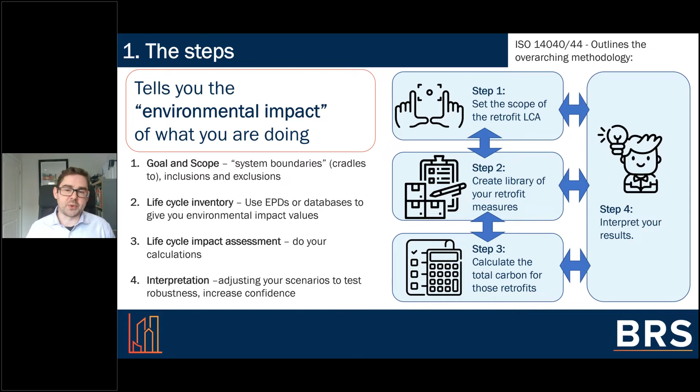So when it comes to scope setting for a retrofit project, you really want to set it so that you get the best perspective on the global environmental impacts of your retrofit measures.

So in terms of perspective, we in the construction industry are very, very good at estimating and calculating the operational energy demand and associated carbon emissions. But operational energy demand is only one part of one stage of a 5-stage process for calculating a building's whole life embodied carbon and environmental impact.

So an LCA provides you with the ability to get the right perspective on how sustainable your retrofit project actually will be. And I guess another thing worth taking away from my talk here this morning is that a truly sustainable retrofit project goes beyond low U values and high COPs for heat pumps.

Setting the scope means how much of the retrofit materials or measures' life do you want to calculate before the retrofit project is handed over to the client, and how much of the retrofit measure do you want to track during the life of the building. That includes repair and maintenance of that material or technology, and how much of the retrofit measure's journey to its end of life do you also want to track.

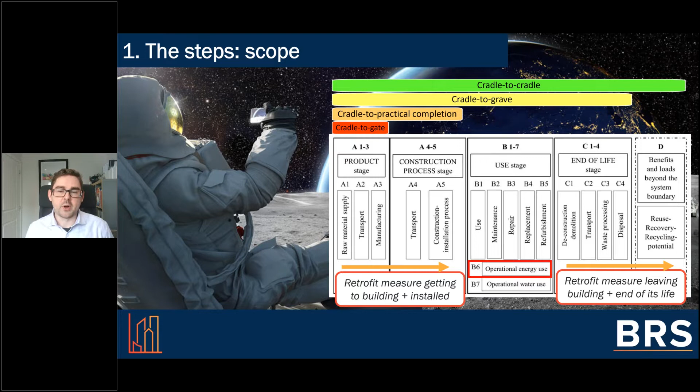So as construction professionals, we can do more to reduce global temperatures by critically evaluating the whole life cycle environmental impact of the materials and technologies that we specify, and changing our supply chain. We can do more to achieve a sustainable future for Scotland by doing that, more so than if everyone in the audience here today left your office, went out and bought an EV this afternoon. And that's what we are calling short-term gains for long-term wins.

Now, I want to talk about the role of the operational energy within the LCA and how that can be used to effectively support your retrofit projects. So I've got two slides here, one for retrofit evaluation and the other for retrofit assessment, which are very, very important steps in your LCA.

Both of these I've covered in a lot more detail in that other BEST knowledge exchange video I mentioned earlier. Now, I have both slides added to this talk here today because I want to continue to dispel the notion that retrofit evaluation only happens at the end of the retrofit when it's complete. Having that approach is very wrong and potentially hazardous, especially for our traditional building archetypes.

So you use your retrofit evaluation toolbox to establish the baseline energy performance of the building before you even start considering what retrofit measures you should be applying to the pre-1919 traditional Scottish archetypes. Because this archetype, more so than almost any other one, will be a lot more sensitive to how your retrofit measures affect the building's ventilation strategy, the thermal comfort, and also moisture dispersion.

So for operational energy calculations, at the very least, you really want to get insightful energy consumption values that you can get from loggers or more detailed fuel bills. And if you can't or don't want to wait a full year to measure the building's energy demand before retrofit, then you're going to need to use other tools like U-value measurement, thermal bridging, thermograms, air permeability, etc., to give you the actual values for use in the next step.

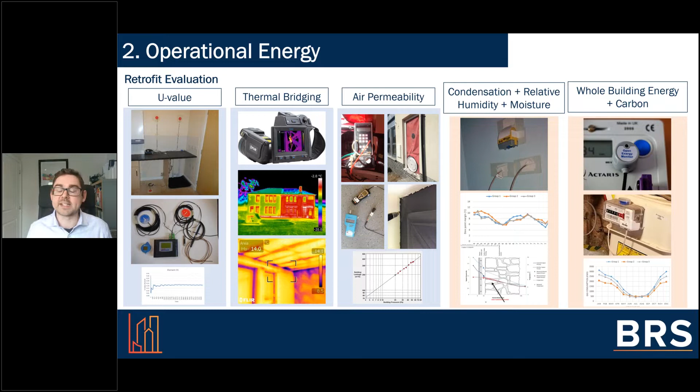And the next step then is retrofit assessment, which does happen only after you get those baseline pre-retrofit values from your retrofit evaluation step. Then, with much greater confidence, you can build your digital model of your building, digital twin if you like, and run your range of retrofit measures through your model to generate a set of retrofit scenarios.

And of course, you'll be looking at other effects of the retrofit measures like fire spread, acoustic enhancement, U-value, psi value, temperature factor, moisture dispersion, etc. And yeah, they all do play a very vital role in the decision making for material specifications, but it is the modeled energy demand reduction from the various retrofit scenarios that you'll be using in your LCA.

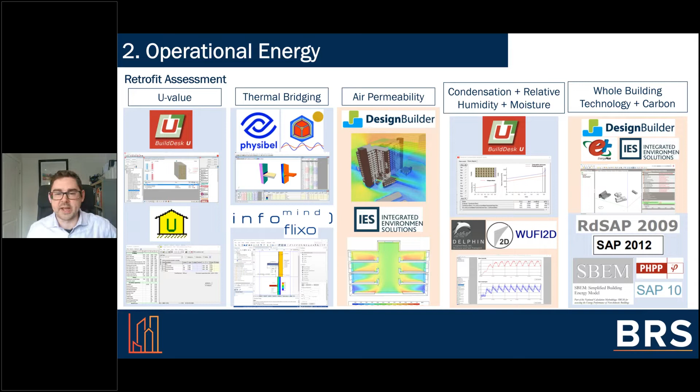And it's really, really vital to get those actual in situ measured performance values from your actual building, as opposed to assuming values from RDSAP or SBEM and other lookup tables.

Right, this is my last section. I'm going to bring this all together and demonstrate how the LCA output is a decision support tool to inform a more sustainable retrofit project.

In the first relationship, for a structural material like steel, say you're extending that 1750s Midlothian cottage with a steel beam system, a Mies van der Rohe kind of extension. Scenario A would be a steel beam that's over-engineered, larger than it needs to be. Scenario B is a steel beam sized exactly for the intended purpose.

Scenario A, the unnecessarily larger beam, will have a larger embodied energy value because more steel was manufactured, more was transported to do the same job, and there's more steel to get rid of at end of life. For both scenarios, if detailed and insulated correctly, the size of the steel member will have little to no bearing on the building's operational energy, but it will have higher embodied energy. So there's a clear winner: you go for the beam that's appropriately sized.

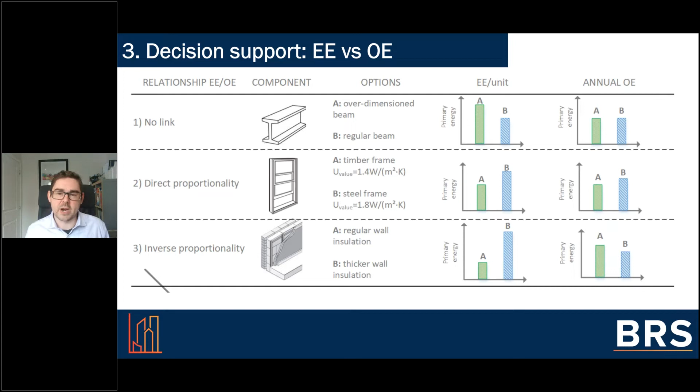This is what we call inverse proportionality, which is really the most common type of relationship you see in retrofit projects. This is what makes LCA the most valuable tool, because in this instance there's no clear winner between thicker and thinner insulation - one's better for the building today, but one's better for the environment longer term. Your LCA will tell you if the operational energy savings will ultimately justify the larger environmental impacts seen in embodied energy.

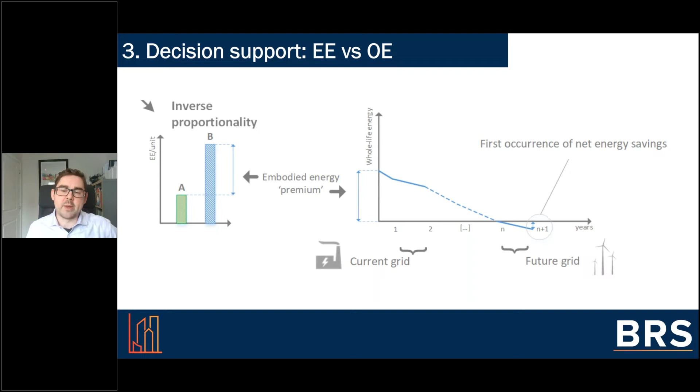So the LCA is here not just to tell you the environmental and sustainability impacts of your retrofit measure today, but it'll also tell you how that retrofit measure will impact the environment in the longer term.

This is my second last slide, and the last two are very quick, so I'm going to wrap up. Coming back to our original question at the start: how can an LCA be used effectively in a retrofit project? The thing to be aware of is retrofit is almost always better than knocking the building down and starting again. There's something called plot renewal, which I haven't talked about today, but that's definitely worth considering for non-traditional archetypes in Scotland.

LCA allows you to make more informed decisions because it is by design a decision support tool, and it's also there to allow you to do carbon hotspotting, which enables material optimization to challenge your supply chain. Retrofitting energy efficiency measures is all about balance, and an LCA allows you to strike that balance between measures and materials that save operational energy and those that help you save embodied energy.

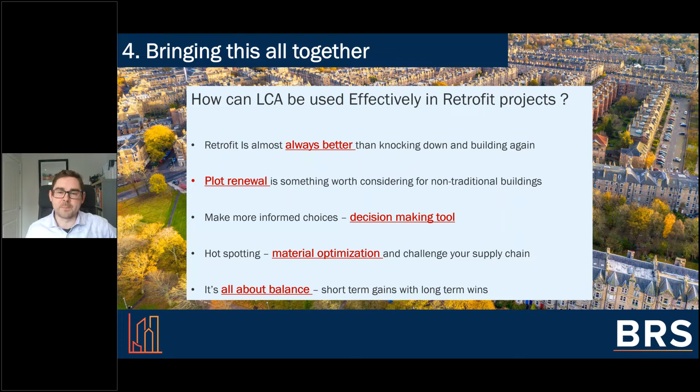Thanks for that, John. Thanks for that excellent presentation. Very informative, and I'm sure everybody agrees that it was really quite insightful in what we need to do for life cycle assessment.

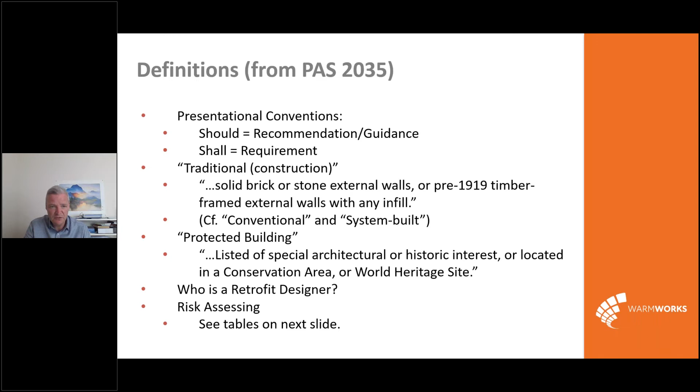Now, risk assessing - I mentioned this is worth clarifying when we move into the world of traditional buildings. PAS 2035 provides retrofit coordinators with a handy ready reckoner they can use when beginning to look at a programme of works, in terms of categorising the risk associated with installing energy efficiency measures. The individual measures themselves will each carry what's known as an inherent technical risk, which can influence the particular path followed. As you move up the risk rating scale from A to C, that tends to place greater focus on the compliance standard being followed through that project.

But traditional buildings are always a minimum of risk grade B, and protected buildings always a grade C, if not higher. A traditional building may be classed as category C depending on, for example, the number of measures being fitted. One thing I would always emphasise is the dynamic nature of a risk assessment.

Any student of retrofit will be familiar with expressions to do with corners, junctions, edges and interfaces, for example, which naturally leads to considering where the wall meets the roof, where the wall meets the ground, etc, and how the external wall insulation will interact with the loft insulation being installed. We consider that around considerations of thermal bridging, for example. But there are a couple of other interfaces which have to be appreciated as part of the process.

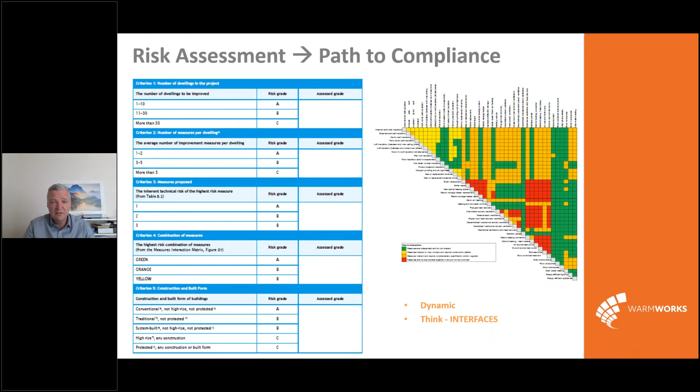Another interface which has to always be front and centre, I would suggest, is to do with the occupant - how the person living within the house uses energy at the moment, any changes likely to happen in the years ahead, how familiar they are, how complex the systems we're looking to install may be, and how they'll be able to operate and live a nice, comfortable life within the property. And that all feeds in from what's gathered during the retrofit assessment. So these are the half dozen or so critical component parts of that.

An energy assessment is conducted by the retrofit assessor, who is a domestic energy assessor upskilled to be qualified and accredited as a retrofit assessor. They'll conduct that RDSAP assessment looking at the asset itself, the heating and hot water system, and the lighting. We instruct all assessors to export that detail into full SAP so the retrofit coordinator can conduct various calculations as part of evaluating the various options.

For any certified passive house designers among you, PHPP is acceptable within the PAS. I mentioned the occupancy assessment, especially if it's a vulnerable person, but it will also introduce heating pattern detail and how the person within the house uses appliances, how much they spend on fuel. The overall purpose is to meet the intended outcomes set at the start of the programme - whether that's a reduction in energy demand, a decarbonisation programme, or improving a SAP score. There's always going to be various drivers or combinations of drivers involved in a programme.

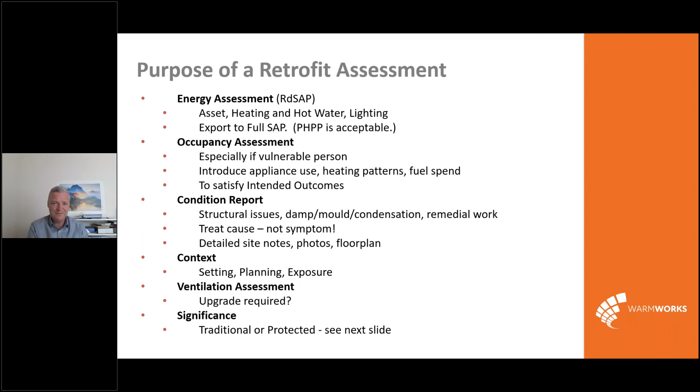And then lastly, significance survey. I'll give you a bit more information on that. I'm not going to go through this line by line, but this becomes more and more relevant when we move into the world of traditional buildings.

So, protected - back to what I mentioned earlier about listed, conservation area, World Heritage Site. If it's a protected building, the retrofit assessor attending site must hold the Level 3 energy efficiency measures for older and traditional buildings qualification, and a full assessment shall be carried out in accordance with BS 7913.

But for traditional buildings more broadly, as defined by the PAS, an assessment of significance shall still be carried out. However, the BSI have produced a simplified version of the significance assessment to allow retrofit assessors to conduct that on site. That's all fed back to the project team, who will review it and take that into account when designing retrofit measures, and then in advance of any pre-installation building inspection which will take place.

And if there's a likelihood of the retrofit measures impacting on an aspect of the building identified, a heritage impact assessment should be conducted as well.

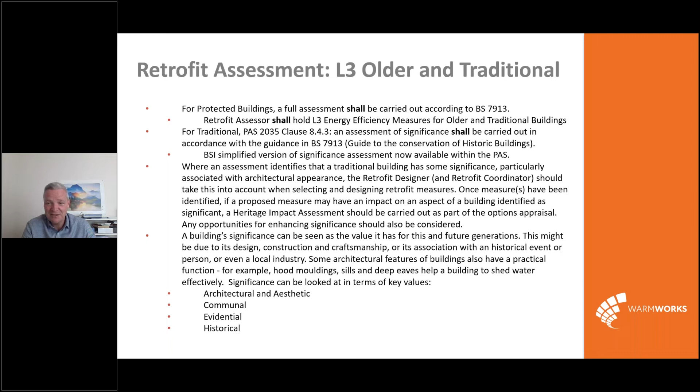Now, I haven't seen Moses' presentation, so I'll not rain on his parade at this point, because I dare say he'll chat a bit further about the significance of traditional buildings. But broadly speaking, those four categories listed at the bottom should give you an idea of the key values that are considered by a retrofit assessor on site.

Put together this skills matrix, folks. I won't go through that in particular detail, but there are just a few key takeaways. I mentioned the retrofit assessor working on a protected building must hold that Level 3 qualification. There'll always be a Path C job by its nature of being a protected building, but it becomes particularly relevant when we look at the retrofit designer.

So there are certain instances where a retrofit coordinator, for example, can act as the designer if they're suitably competent, or they may engage with, for example, a member of the Chartered Institute of Architectural Technologists.

But as we begin to move into more and more traditional properties, there is a requirement on Path B jobs, as they'll all be as a minimum, for professional retrofit designers who are members of a chartered body to hold the Level 3 older and traditional qualification, or to be a member of the respective conservation scheme.

When we move into the world of Path C jobs, the membership of the conservation scheme begins to become mandatory, whether that's a traditional building or protected building.

So the key takeaway from that: if you're a contractor, a managing agent, or anyone involved in the overarching project management of the delivery of PAS 2035 compliant works, you must engage with chartered architectural technologists, architects, builders, chartered surveyors, engineers, whoever has the relevant competence to produce and review the designs and assist the retrofit coordinator accordingly. That particularly becomes relevant when evaluating the project, how well we've delivered on the intended outcomes. And as you can see at the bottom, that qualification Moses delivers pops up again as a mandatory requirement.

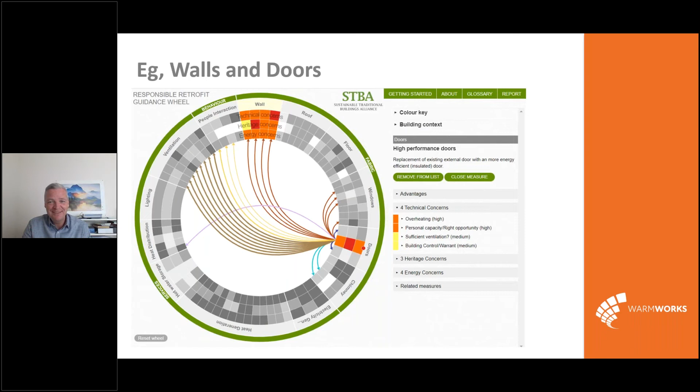But the good news for any budding retrofit designers among you, members of a chartered body considering where to begin, there are a couple of tools available. My own personal favourite is the Sustainable Traditional Buildings Alliance Guidance Wheel for Design. It's a dynamic website you can access through that link at the top, and you can play around with it. There's a drop down where you can put in various different types of heritage or exposure status for the property. When you look at individual measures, you'll see on this one I selected upgrading the walls and also the doors, and it begins to make suggestions in terms of the interaction of measures, bringing in technical concerns as well as heritage and energy. So have a look at that website in your own time, I hope you'll find it as useful as I have.

Hopefully I've managed to stay on time, and I'll be delighted to answer any questions you may have. Thank you.